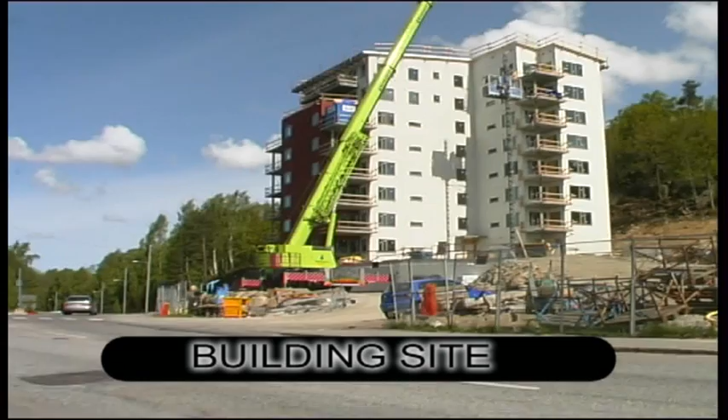We will now follow the entire installation process for an apartment that is under construction.

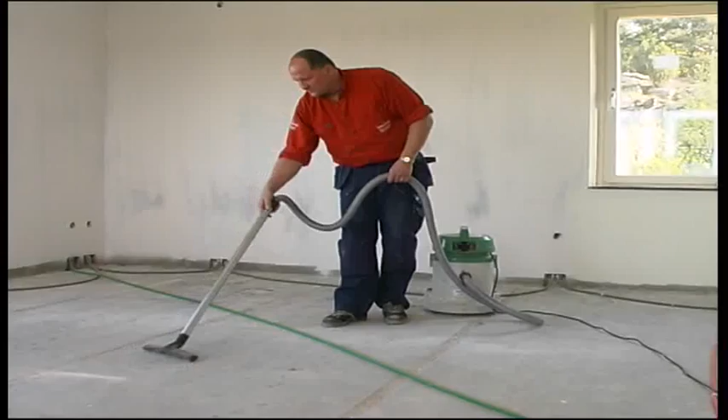Begin by checking that all installation is complete. The installation surfaces are to be swept and vacuumed so that no organic material or other residual products remain on the floor surfaces.

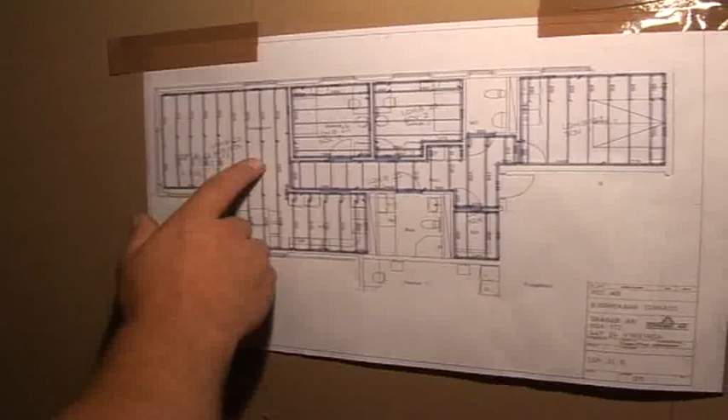Check using the address label that you have the right girders for your apartment or room. Granab also supplies installation drawings for specific objects. Observe the position of the girders on the laying drawing.

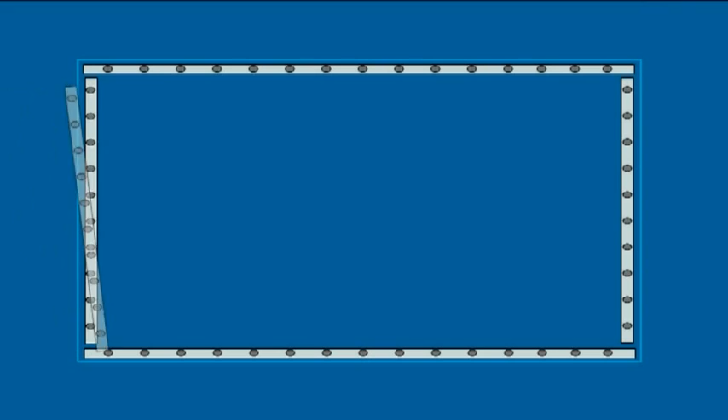Commence installation by laying the frame girders. Keep a distance of at least 10 mm from the wall. Then lay the first girder with a CC distance of 400 mm to the frame girder, and then the remaining girders at the CC distance of 600 mm.

It can be helpful to use Granab's girder spacers. The distance to the ends of the girders must be at least 5 mm.

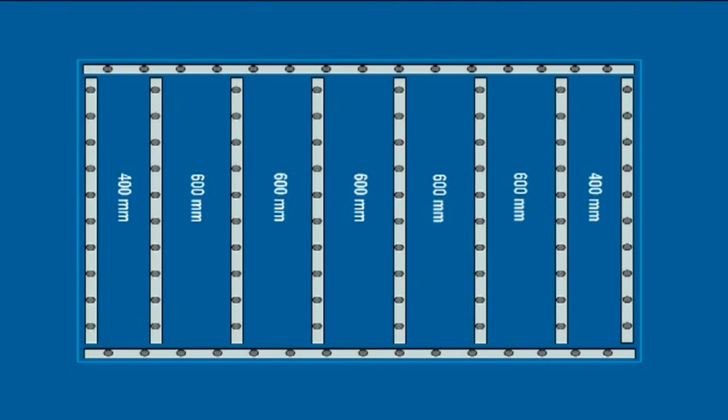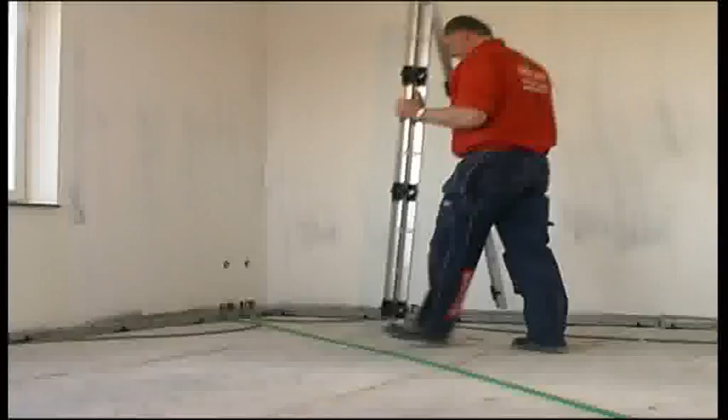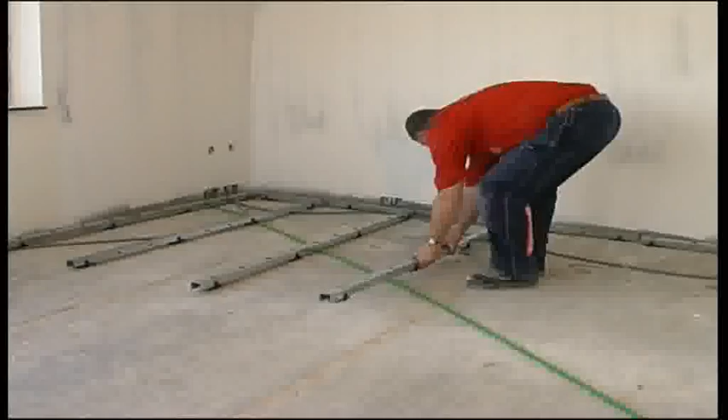Position the girders according to the laying drawing. Use Granab's girder spacers for more flexible installation.

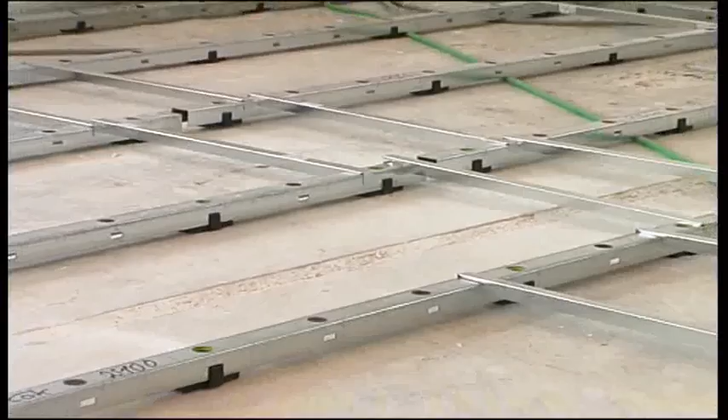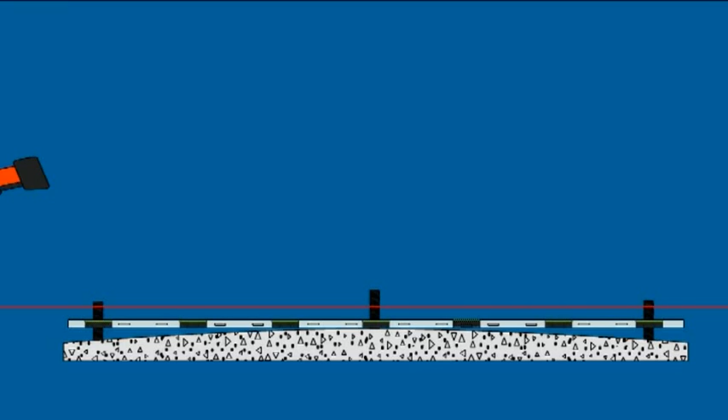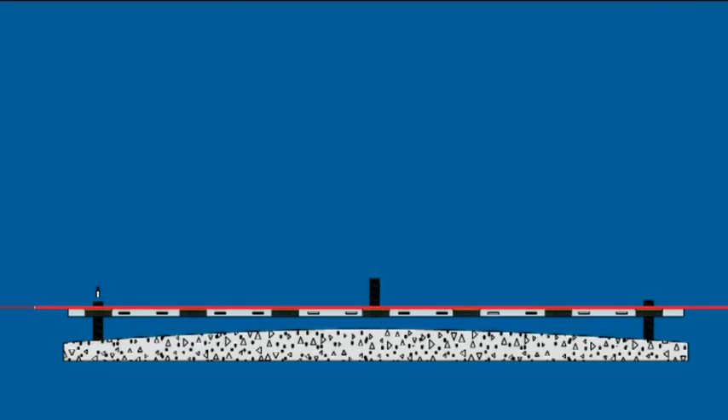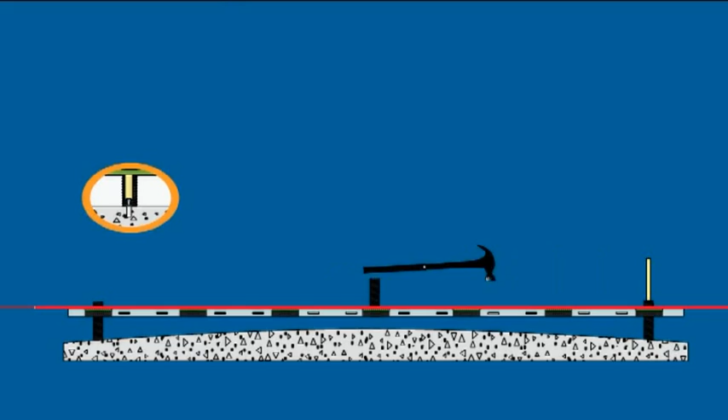Start by screwing the ends to 10 mm below the final height. Then use a 6 mm drill to drill approximately 30 mm. Feed the concrete anchor through the level adjustment screw. Secure the concrete anchor using installation manual 1. Then cut off the adjustment screw level with the top of the girders.

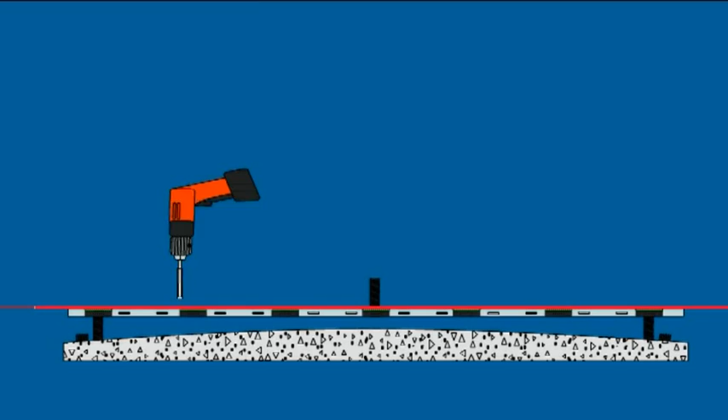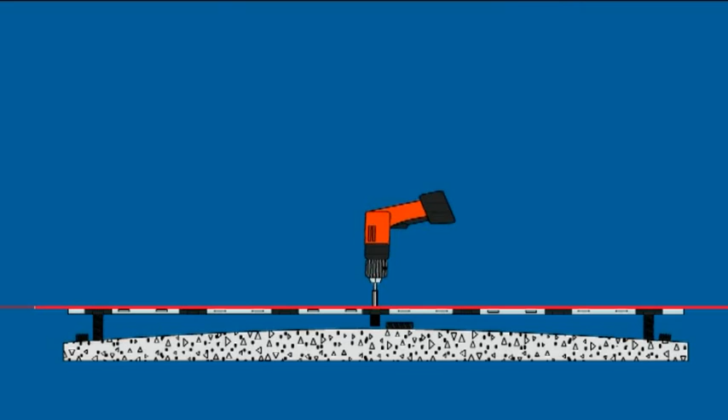Then adjust the girders upwards to its final height and screw the center screw to 10 mm above the joist. Cut off the adjustment screw. Screw to the base. Drill. Insert the concrete anchor. Secure.

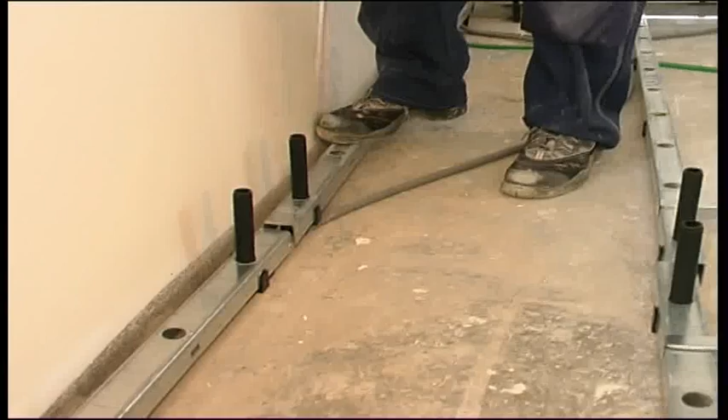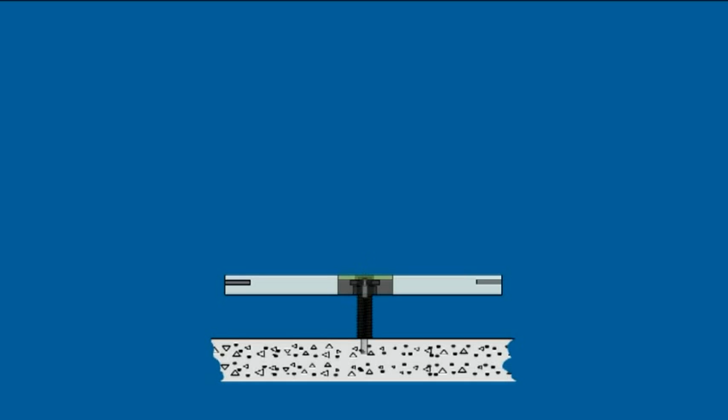Insert the adjustment screws at the ends and center of the frame girder. Screw the ends up to the approximate height. Use a 6 mm drill to drill approximately 30 mm. Feed the concrete anchor through the adjustment screw. Secure the concrete anchor using installation manual 1.

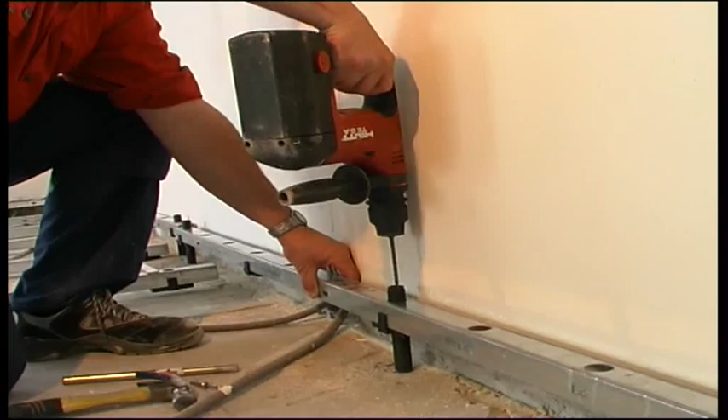Drill approximately 30 mm. Insert the concrete anchor. Secure.

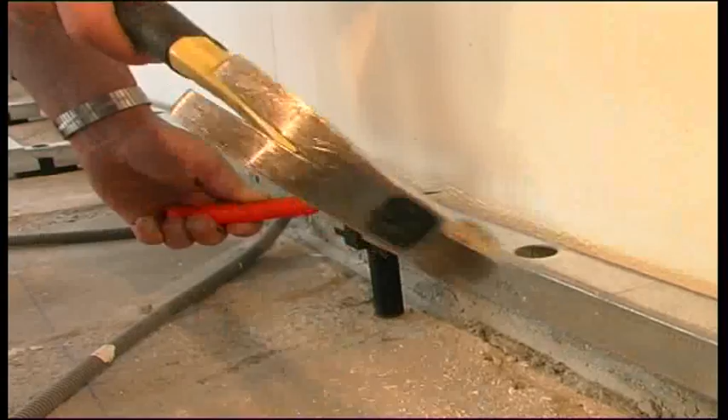Adjust the frame girders to 10 mm below the final height. Then cut off the adjustment screws using a knife or a chisel.

Adjust the other girders upwards to 10 mm below the final height. If girder spacers have been used, large surface areas can be adjusted in one easy process.

Drill and insert a concrete anchor. This method can also be used for large surface areas.

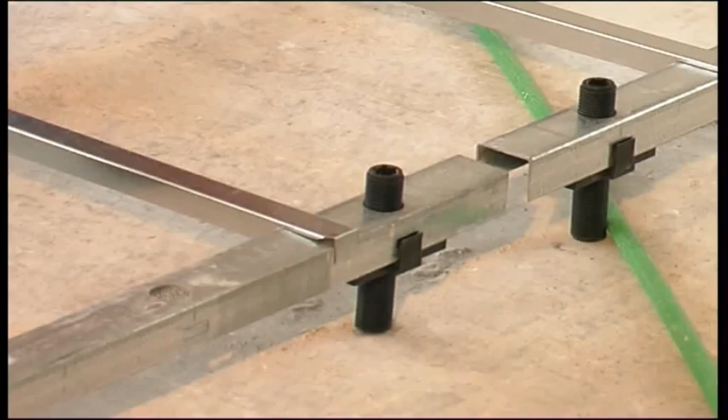A longer mandrel can be used during the securing process for better ergonomics.

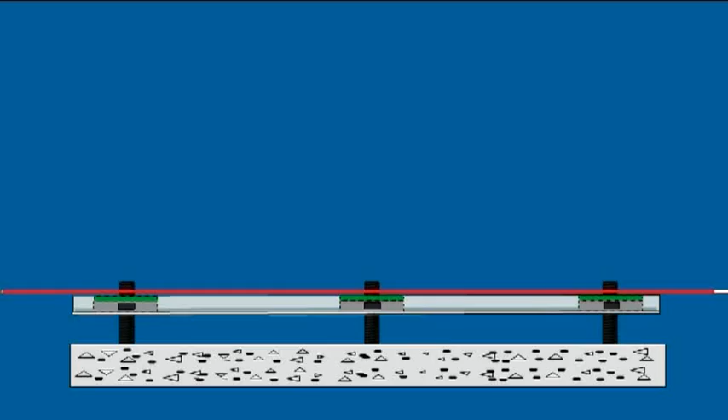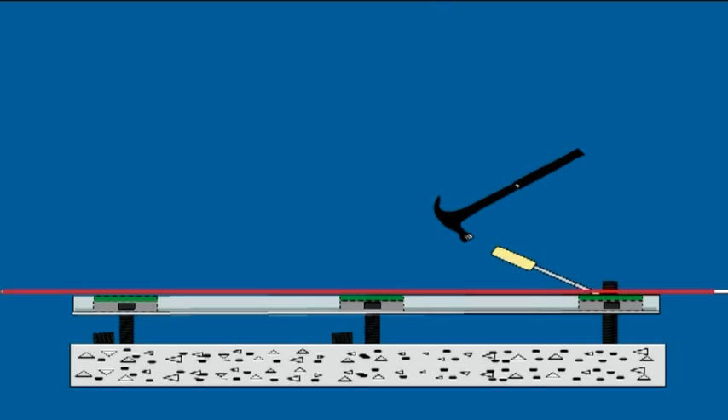Now cut off the adjustment screws on the girders close to the surface. We cut off the adjustment screw when the girder is 10 mm below the final height, in order to prevent the adjustment screw coming into contact with the overlying flooring when the girder is adjusted upwards.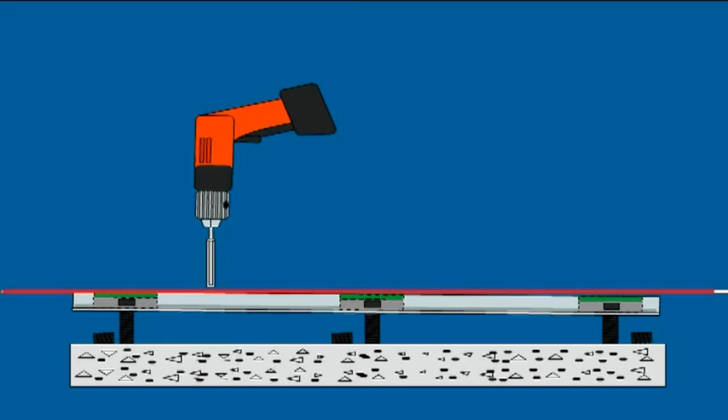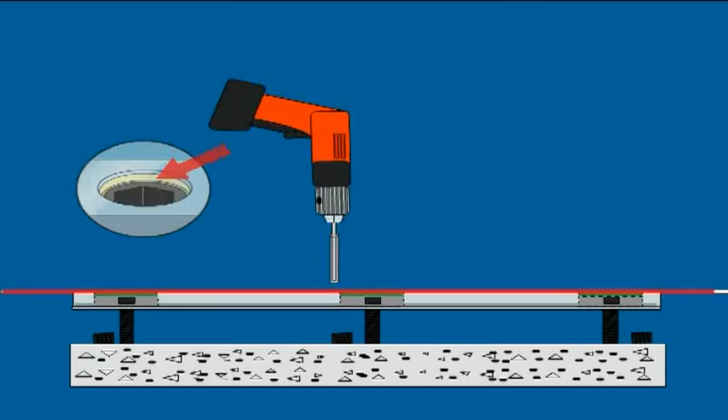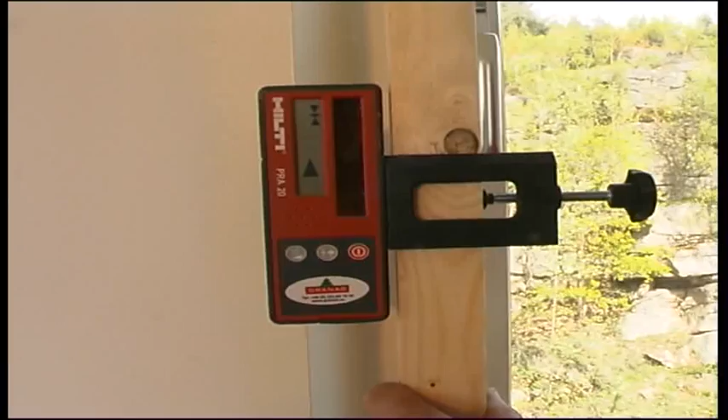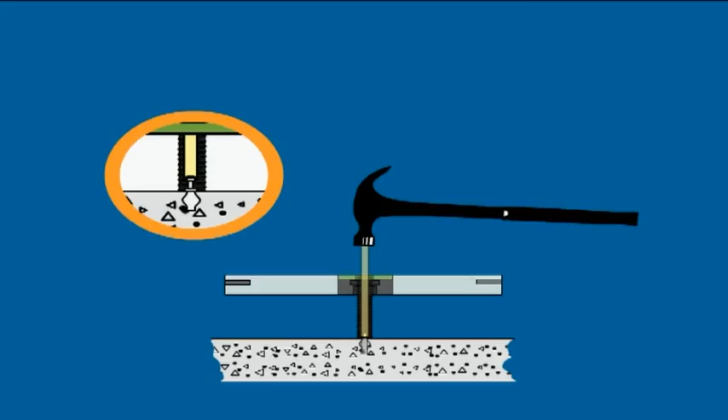Now adjust all ends and center screws upwards to the final girder height. Secure all fully adjusted screws using installation mandrel 2. It is possible to use a long mandrel here for better ergonomics.

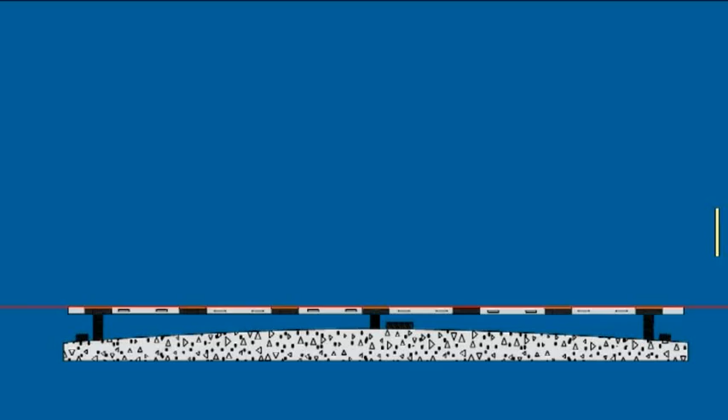Insert the remaining adjustment screws into the girder. Screw in the adjustment screws until they are approximately 10 mm above the girder. Cut off the adjustment screws.

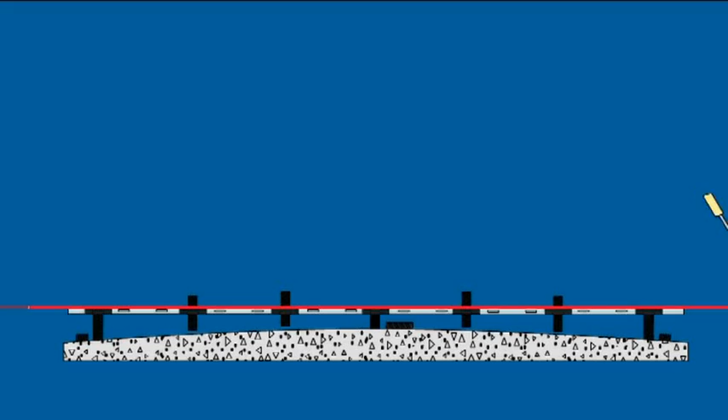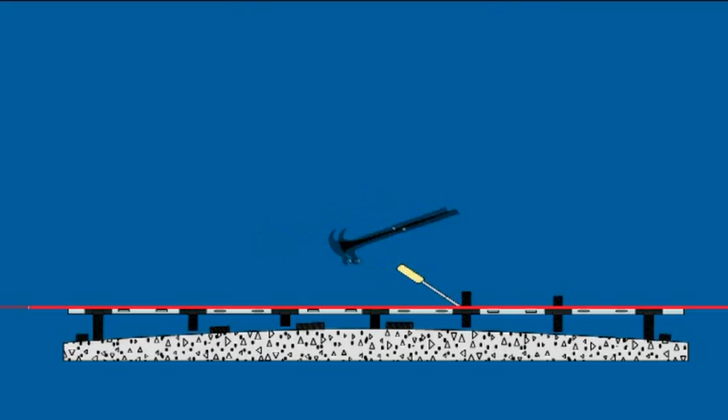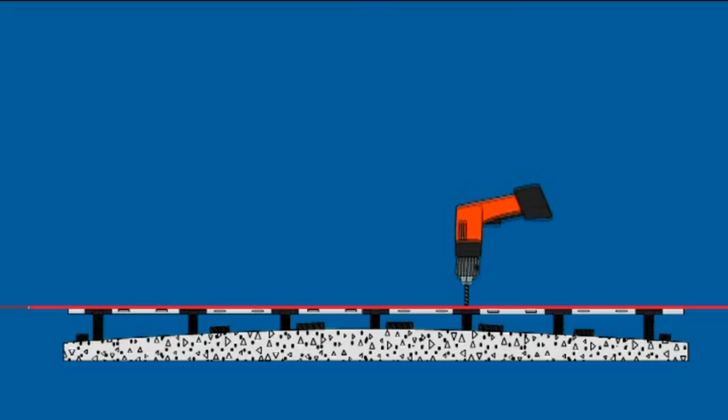Loosely screw the adjustment screws to the base. Drill. Insert a concrete anchor. Secure with installation mandrel 1.

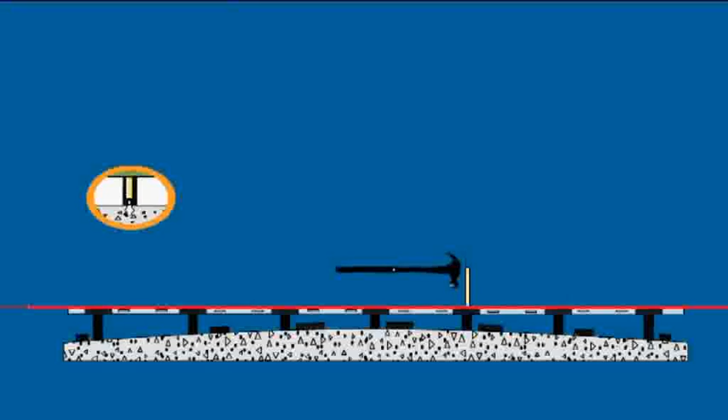Adjust the last lot of screws to the final height. Secure with installation mandrel 2. Screw in the adjustment screw to 10 mm below the joist.

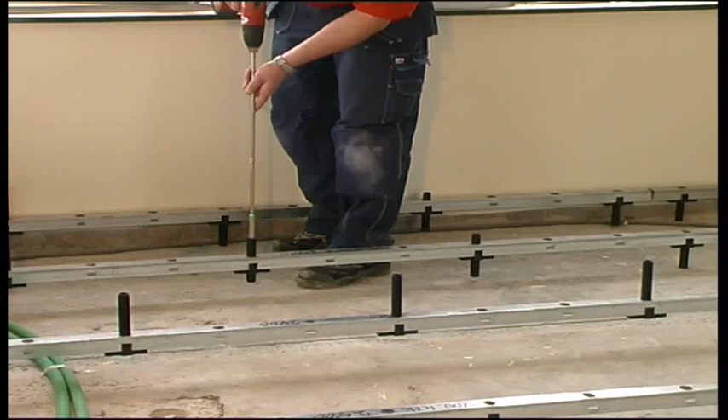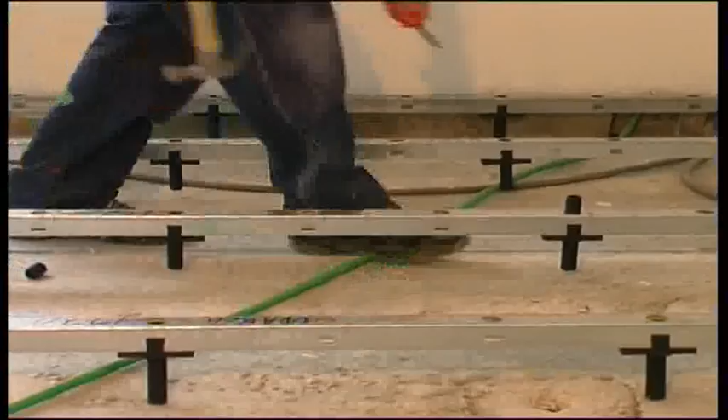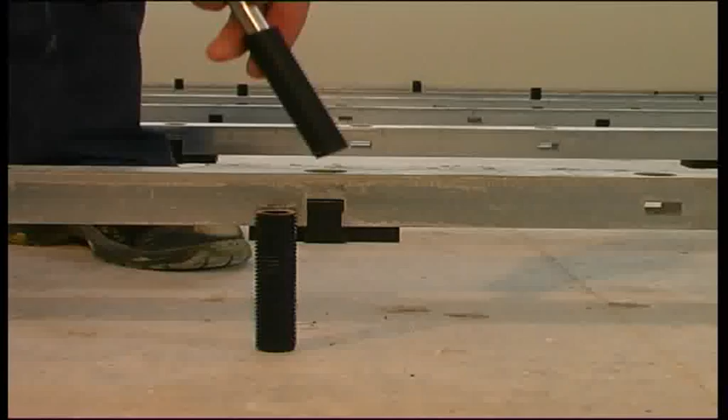Cut off the screws. Loosely screw the adjustment screws to the base. If the base is fairly level, within ±3 cm, you can use the ready cut screw, which helps optimize installation.

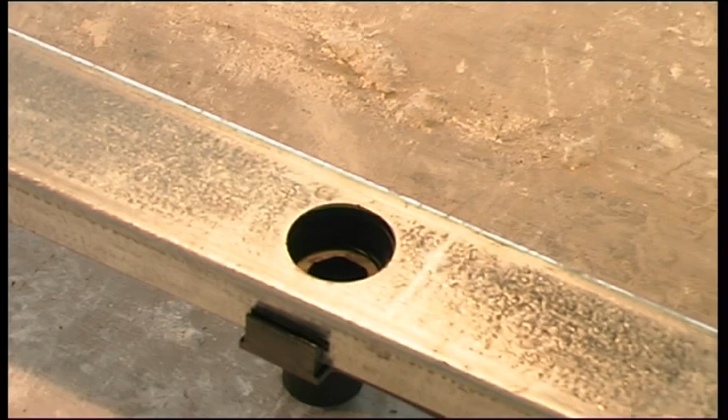Please note that the upper edge of the adjustment screw must be at least 10 mm below the top of the girder. The next step is to drill, insert the concrete anchor, secure with mandrel 1, and adjust the height. Secure with mandrel 2.

Once the room has been cleaned, the floor covering can be laid. Perform a self-inspection using Granab's checklist 1.

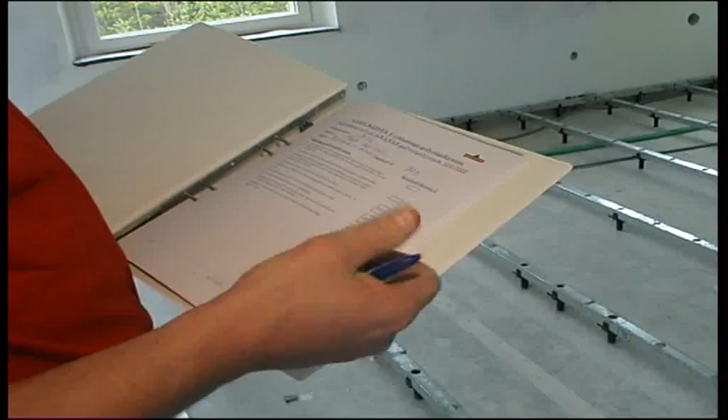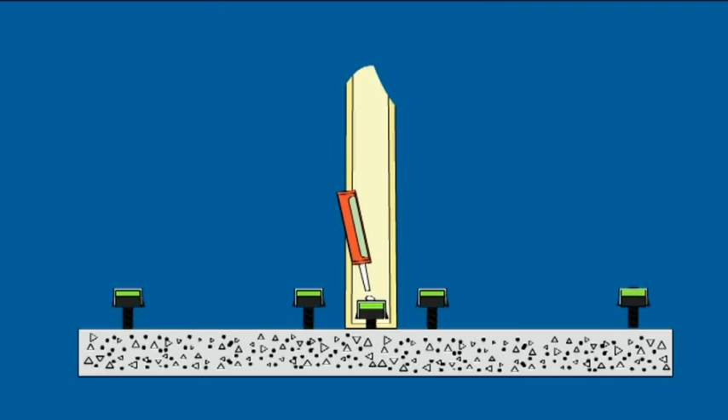For doorways and expansion joints, a Granab girder is positioned in the middle of the doorway and adjusted to 22 mm below the other girders. Attach a 22 mm board using adhesive. Lay the particle board or parquet. This gives a good surface to mount the door sill.

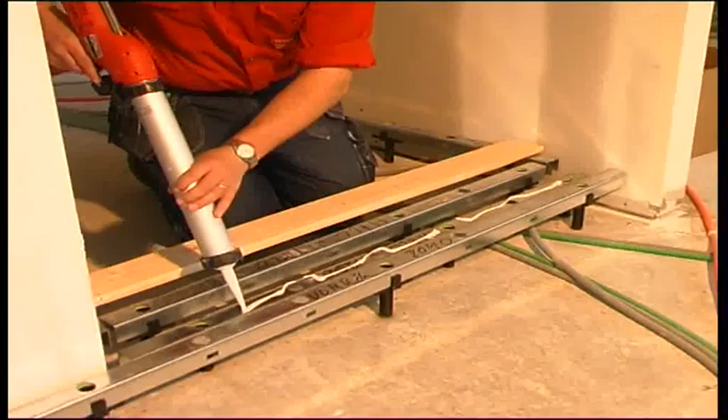This is an expansion joint. Attach a board using adhesive. The board must be the same height as the other girders. This provides a good foundation for the raised floor and a suitable surface for attaching a door sill or similar items.

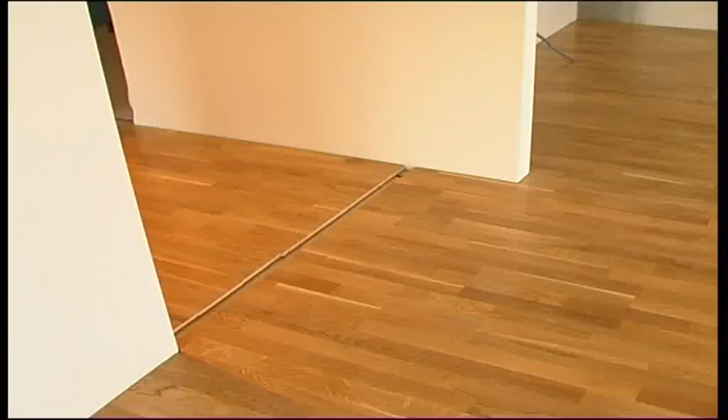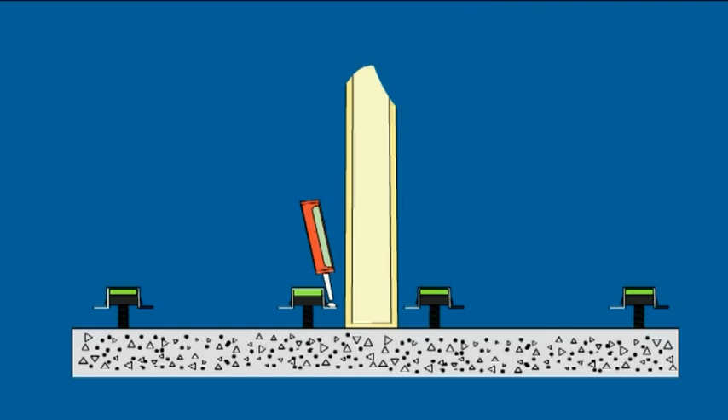With System 3000, a wider board can be used. Attach the board using a thick adhesive and check the height in the same way as with System 7000.

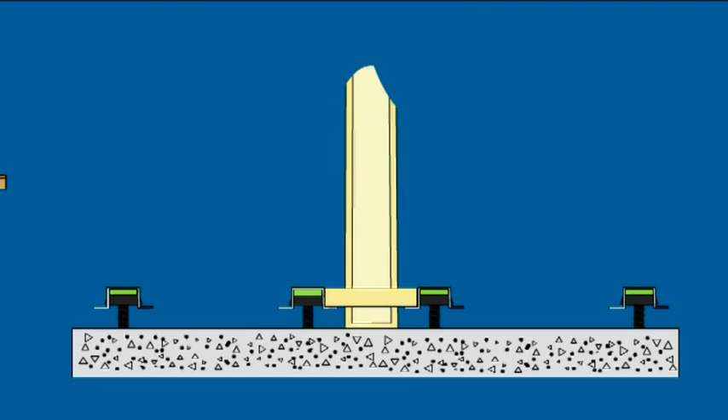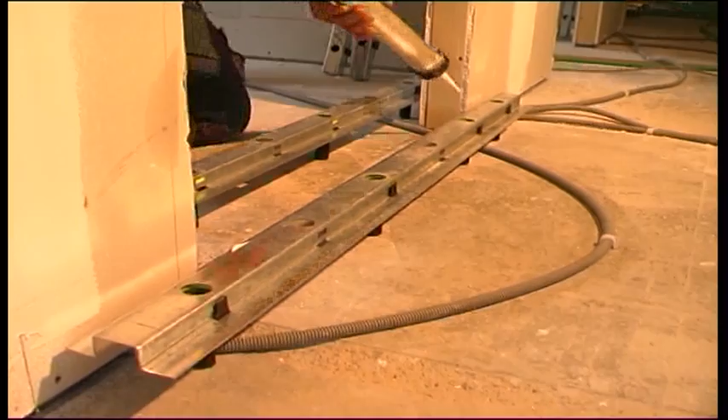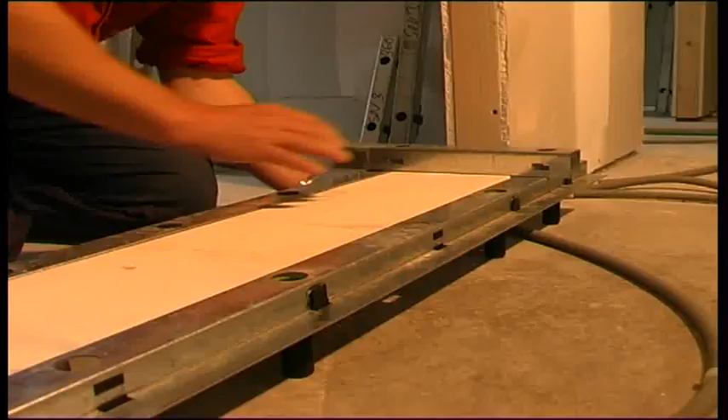Apply a thick layer of adhesive to the brims of the hat profile. Position the board and check the height. You can also use a straight edge or spirit level during installation of Granab's subfloor system.